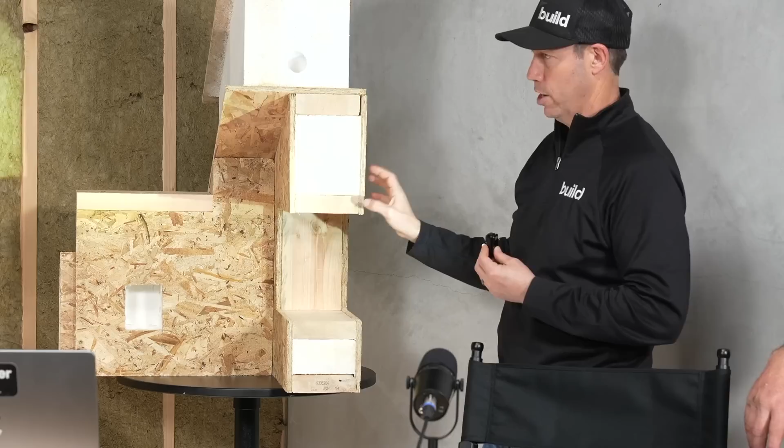We've got our normal wall panel, which this is a 6.5-inch wall panel, which is an R26. So what you're seeing here, I'm sorry to interrupt, this is the actual insulation. Correct. He's talking about oriented strand board on both sides, and we're going to talk about what kind of that is. That's a special type for you guys. And then you're also going to notice there is some framing embedded in these panels, but the panel itself might go a long, long ways between framing, correct?

Correct. Our normal framing factor will be 3 to 5% of a build in comparison to 25 to 35% of a build. That's amazing. So a lot more insulation, and that's the basis. We're using expanded polystyrene as our core, and whatever the thickness of that core, the stronger we get, the thicker we go with the panel. So it just depends. Our strength is awesome, and panels themselves, they're 2.5 times stronger than a conventional framed wall.

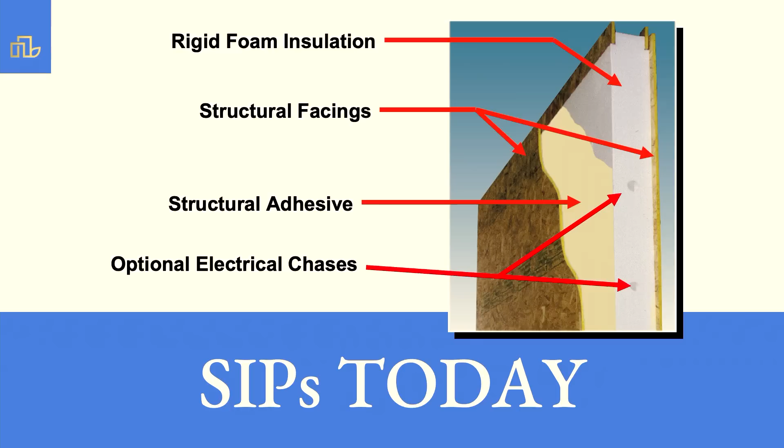Holy cow. So, building them in big pieces, which Extreme, we're really good at that. 8 by 24 jumbo panels, and the makeup of it is literally the glue, as you can see between here. Some panels they inject foam. This is not. This is a block of foam, and we have a glue line. So when we're making an 8 by 24 panel, we've actually got 14 pounds of glue holding that panel together. Holy cow. And it's done under pressure, and it's done under perfect conditions. Right. And it's really great.

And as you can see, we've got the electrical chases. You can see the holes in there. You can see holes here. We have outlet and switch chases in that panel. Shine my light into that one right here. So it's going to be a little hard to see, but see how my light is coming through here? This is an electrical chase that allows you to go up or down. And then not shown here in the panel, what I've seen on the job site is you guys are marking those chases, so you know exactly where they are.

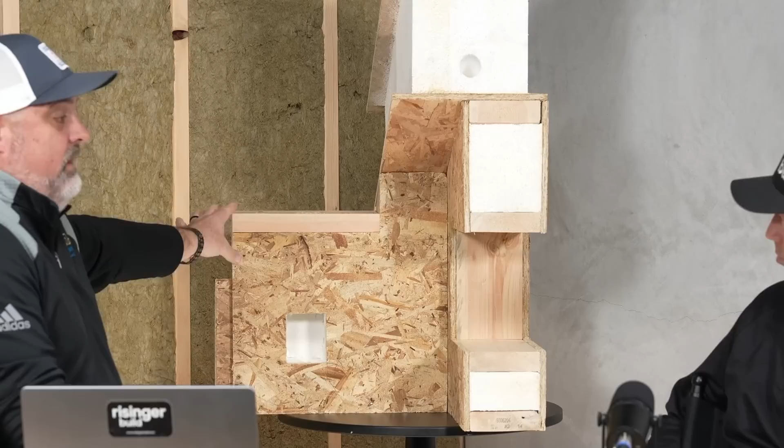That's cool. And like here, what we're showing you is a truss detail. So if we were to put a roof truss on there, you have a double top plate for that truss to sit on. But if we do a paneled roof, we are bevel cutting that panel at the pitch of the roof, so it's all continuous and it's seamless. Would you actually pull that panel off real quick? Sure. Since you dropped it in, I think it's kind of cool to show guys.

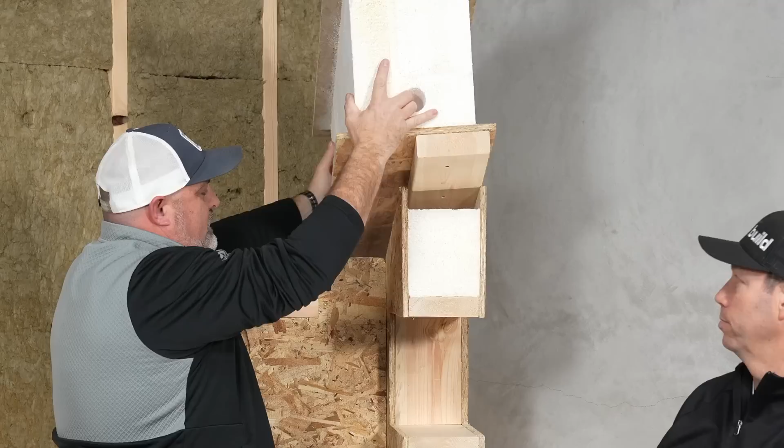So in other words, this is already attached, or we're attaching that in the field? This would be put in the wall first. We just simply did it for a demonstration purpose. So this is in the wall already. And then we have a long screw that comes through and attaches to this. Plus we're putting beads of sealant here to stop air migrating. And that is a giant piece of EPS.

What's the R value on that panel? This is an R, we call it a 49. That's what we're using in Minnesota all the time for the northern climates. But without having those members, our insulation value, because it's continuous everywhere, actually goes up. And the performance of the building is just greater because we don't have the thermal loss everywhere.

Yeah, if you look at this wall in my studio here, a lot of builders would call that an R19 wall if there's an R19 batt in there. But the fact that you can see all those studs, and this is a 20% framing factor, let's say, this is not an R19 wall. Right. Whereas when you guys have a panel, we have very long distances without studs and massive amounts of insulation, so you have a much higher overall effective R value, correct? We try to do the whole roof without lumber in it, if that's at all possible. Yep.

In that case, we try to put more structure under a roof than actually within the roof. Makes sense. So, SIPs have been around, Matt, a long time. We love this picture. We found this. We believe this was in Wisconsin, probably in the 1930s or 40s. They were cardboard cores with plywood skins, and that's really the stress skin panel. That's where it really evolved. It was in Wisconsin, UW Madison. Is that really right? That's where it was. That's pretty awesome.

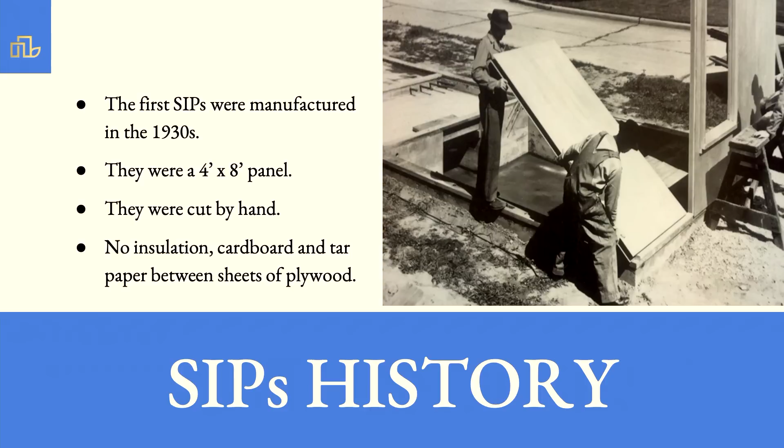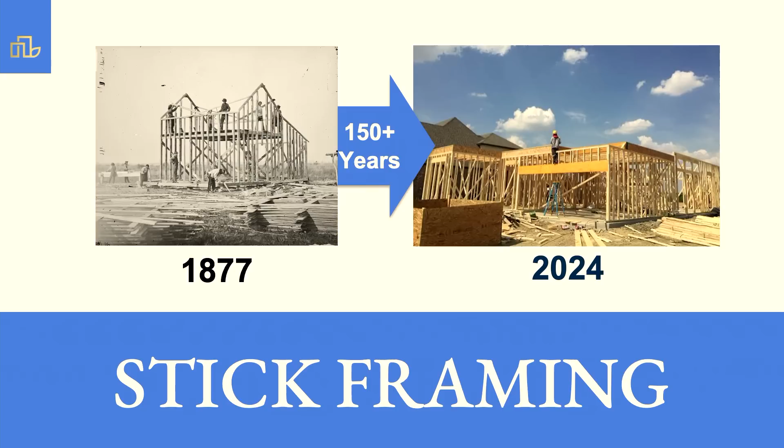So they were mainly 4x8 panels. They were all cut by hand, but the insulation wasn't back then. It wasn't Dow. It wasn't styrofoam. So it's great that we are 100 years old in terms of construction. That's pretty cool. I love this, this is a Sam Rashkin. From 1877 to 2024, we really haven't changed a whole lot, have we? It does bother me that our industry is very slow to change. Yeah, it's just one of those things.

It's a tough one. Why consider SIPs? You're going to hear some really good reasons today with Todd and Eric here. But the strength, it's huge. We can compare our 6-inch wall to a 2x10 strength-wise, and no one builds with 2x10s. It's really the most energy efficient building method out there. That's a system. And we are code compliant. We've got all of our code listings and everything that's needed for code.

Our walls are true and straight. And that's what builders are going to notice the first time they do a building: wow, this thing is super flat, it's square, it's true. The top of the wall is the same. It's awesome. That's awesome. When you're sheetrocking and trimming and all that is when you're really going to notice a big difference.

During construction, you don't need a lot of bracing. Yes, you need bracing, we can't tell you don't need it, but we've seen buildings go up without bracing, and they've gone through 90 mile an hour winds, and they're fine. Holy cow. It's crazy. The shear of these buildings is incredible. And because we're gluing it as we're putting it together, you're not just setting a panel and the fasteners are holding it. The SIP seal that we use is a structural adhesive, and it's amazing. That's not in our numbers or calculations, but it's an added benefit. It's air sealing, but it's also helping with our structure.

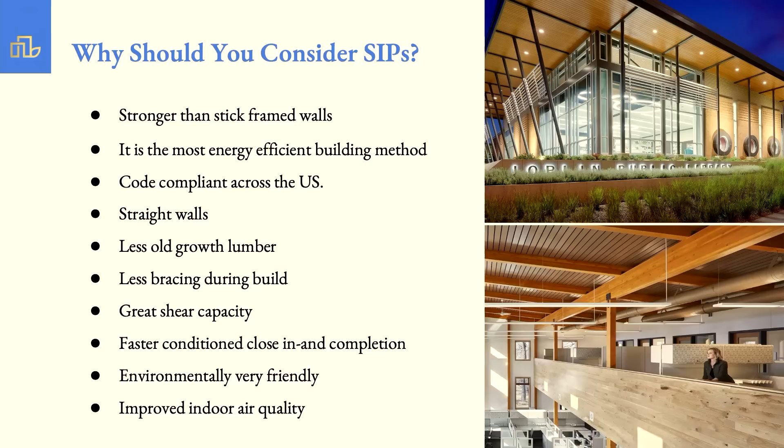Right. I love the term environmentally friendly here because everybody sees waste on a job site. With our system, guys, what do we have for waste on a job site? You're talking a garbage bag a day. That's about it. It's crazy. So we're not putting things in the landfill. It's amazing what this system can do. Every piece gets used. When the job's up, pieces are gone. It's really cool. That's awesome.

And indoor air quality. When we have a wall that isn't allowing things to flow through it, we are protecting our indoor air. It's a huge factor in today's world. It's a big deal. So always bring in fresh air. We're so tight, we need to do that. That's just a given. Let me pause you for one sec. Sure.

I think one of the things that's really hit me about Extreme Panel and your technology, SIPs in general but yours in specific, is that this is a really straightforward way to get a very well insulated, very airtight house. I've done a lot of stick builds. I've only done one SIPs house in my career. I've done an ICF house. This is a really built-in way to get high performance. If you stick to the plan, it's like a guaranteed result. Whereas with stick framing, you've seen my videos, there's a lot we need to do to get a very airtight building. It's built-in performance, which I really like.

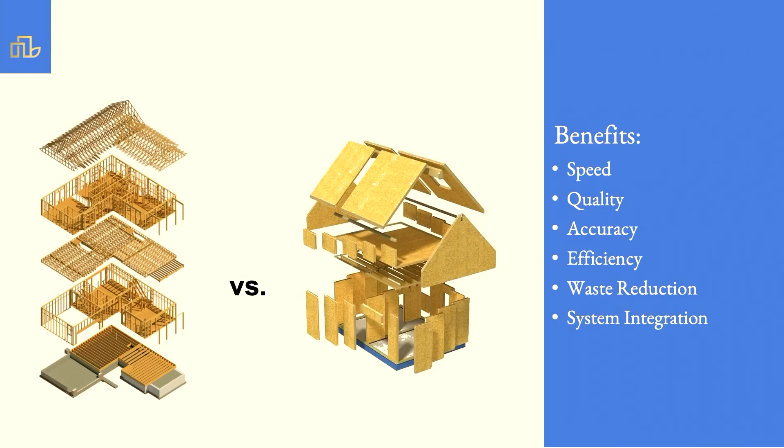The speed is huge. We have found in the jobs that we've been to in Alabama, literally having houses right next to each other, they are able to do 2 of our SIP homes in the time they can do 1 stick-framed house. It's pretty amazing. So with the same crew, the same weather, everything. So the time of construction is getting knocked way down, which is just phenomenal.

The panel company differences: Extreme Panel, I feel we're one of the top companies in the industry. We've been doing this for 33 years. There are companies out there that just do blank panels. You cut them on site, and that's out there. We used to send a lot of blank panels out. Now that's like 1% of our business, if that. There are projects where you could just have panels come pre-cut, and you could supply all the miscellaneous material.

But our normal package is what we call a ready to assemble, where everything is pre-made. All the headers are actually pre-made, pre-cut. They're insulated. The king and cripple studs are pre-made and labeled, and if that header is number 11, you've got 2 pieces labeled number 11 that are supporting it. And that is what Extreme has really become really good at.

Yeah, that's huge. We just got word from a customer this week that they used our package for the first time instead of other companies, and they were really happy with the package, how full it was. Everything's trimmed. It's a different package than what's normally out there. That's awesome. And we try to be all inclusive where every piece is coming. And I think that's a theme you're going to see us talking about a lot, and I suspect that both Todd and Eric are going to mention too how Extreme Panel is a different company than a lot of manufacturers out there. Yes, right.

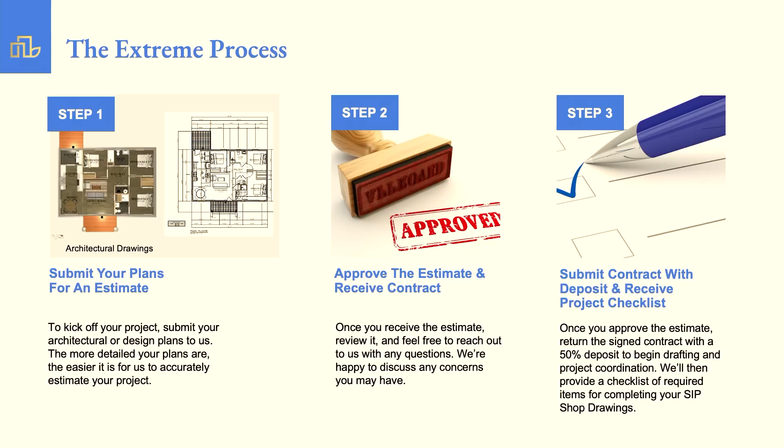Yeah. The Extreme process. We really like having this laid out for our customers so they know what's happening. And what Extreme is really trying to do is help builders with their issues on site, what makes their projects not go well. And I just heard from a builder that we're hopefully doing our first project with here soon. And he just said, it seems like all these companies just want to sell their material and walk away, and I have to deal with the problems. And he's like, I really want service. And I said, we are that company. We can give you that service.

We have a whole group of project coordinators, a whole group of drafters. Our team is really doing a good job at getting the details and putting it all together. Our sales staff, I'm so proud of my guys. They're just amazing. And our process is very well laid out. It's basically 9 steps. We go through everything in detail, a full set of shop drawings that you're going to get, no matter if your project's an ADU, a garage, a huge shop, or a mansion. We go through the same process for every single job.

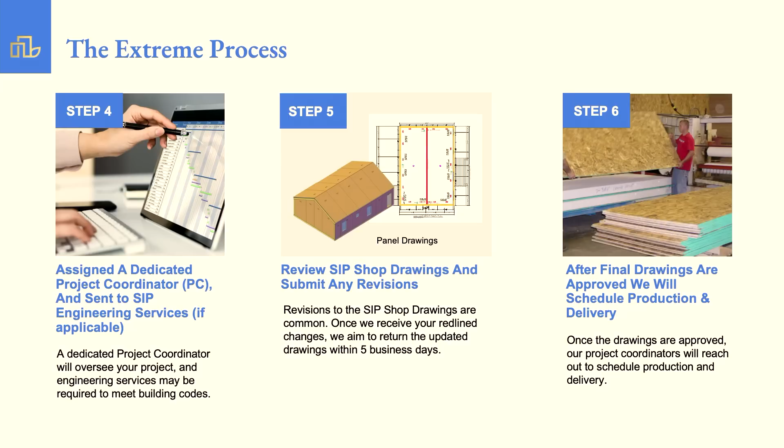That's awesome. We're asking the same questions if it's a dog house or if it's a 10,000 square foot house. So everything gets the same treatment. And it's really quite amazing. And it just takes care of everything on paper before the issues arise. So our coordinators are asking all the right questions because we want it right the first time. So they do a really good job, and I'm very happy with our process. And you can review this on our website. It's all on there, and it makes it simple for you, the customer.

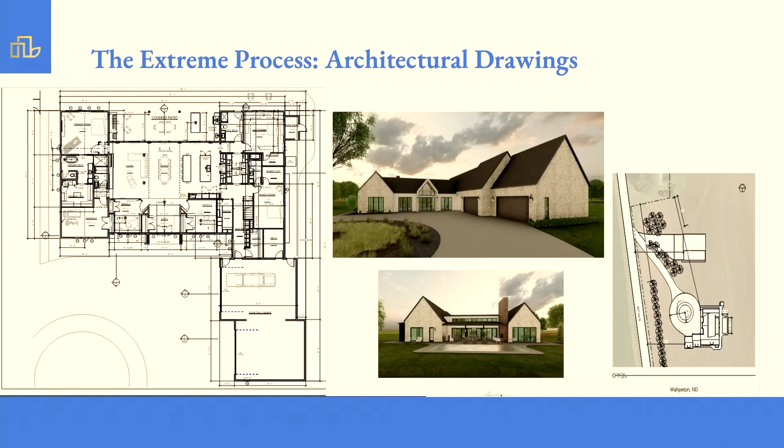And I mean, we're seeing drawings, the basic drawings. We just saw one out in your office, Matt. We see the higher end home as kind of our basis. That's our niche market.

But we see napkins. We literally see it. We see people that want a 30 by 40 garage or a 50 by 80. I mean, we see it all the time. That's awesome. And we can help guide people through the whole system. And you guys have an engineer that you can get for your designs, right? So you don't have to have an engineered set of plans ahead of time.

And typically what's happening is somebody's bringing us a set of plans, but we need to go through and kind of value design. What works with our panels? Maybe a certain roof system isn't going to be what they're going to want to work on. So we can just do walls, or we can just do a roof. We can do certain parts of projects. But it literally depends on what the job is. And we'll go through every plan up front and try to figure out, what do we want to do? How do we want to do it?

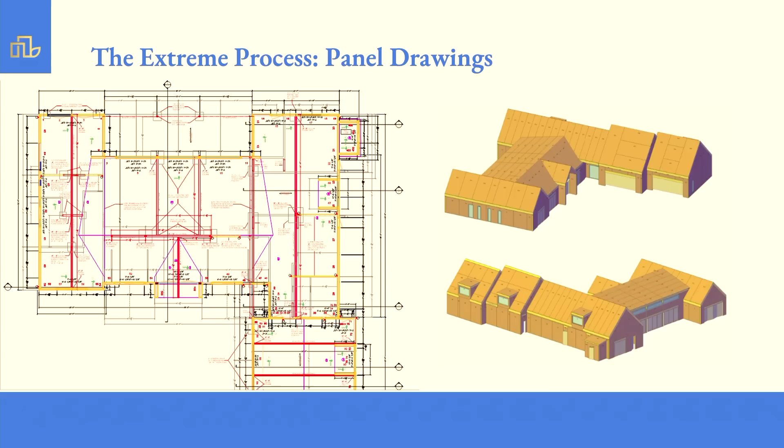And right here we're showing that job, the actual panel drawings of that project. You get a 3D view of those drawings, and depending on the job, this job probably had 15 or 20 pages of drawings, all just panel layout structural drawings. That's great. So it is really good. It's very advanced, and every detail is there. A lot of it's for the manufacturing, but it also helps out the builders. So all those little details that go into it really make a big difference.

So our panels, the main basis of Extreme is an 8x24 jumbo panel. Let me pause you for a second there. Meaning, when we see 4x8 sheets of OSB on the job site, that's not what these are being built from. They're getting a direct shipment from the manufacturer of 8 foot wide by 24 foot long in one sheet, as if it was one jolly green giant sheet of plywood, right? This is a massive sheet. It's a massive sheet. And we actually get them larger than that 8x24, because when we press it together, we can press that together in 4.5 minutes, which is wonderful, with one guy running a computer.

Wow. That's pretty wild. It's an amazing machine, and we want you to come and see it. I would like to see that. That would be cool.

And it's Terry Deacon, our founder of Extreme. It was in his head for years. He couldn't wait to get this thing made. And it's literally been the best machine because it's one person making 192 square feet in 4.5 minutes. Oh my gosh. That's really cool. And that 8x24 panel, we will cut it. It'll get cut perfectly according to the panel drawings.

And then they're sent out with zinc borate treated skins. So at Extreme, we don't give people options of the board. That's the only option we have. So your OSB is already zinc borate treated? It has zinc borate. We call it Structure Shield. You can't buy that off the shelf. No, you can't buy it off the shelf. And that allows us to really sell panels all over the U.S. because it's termite and bug resistant.

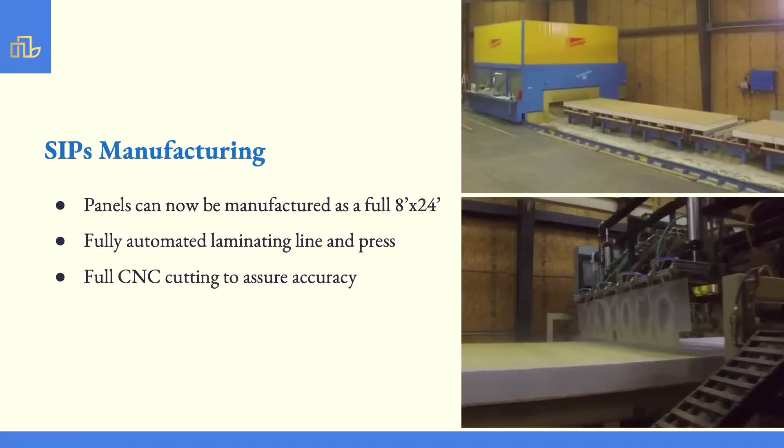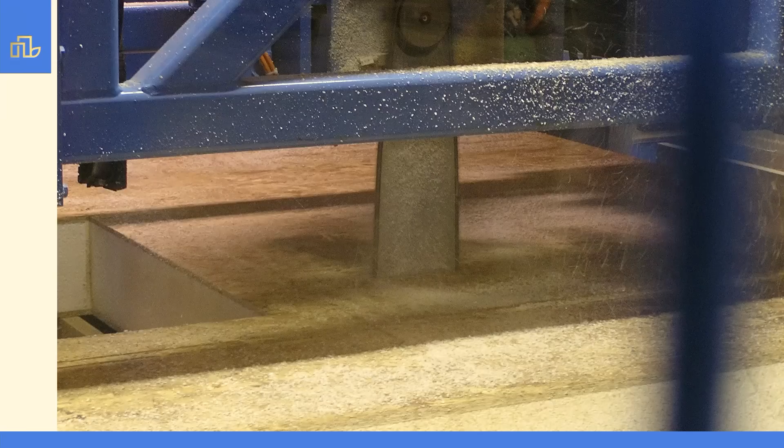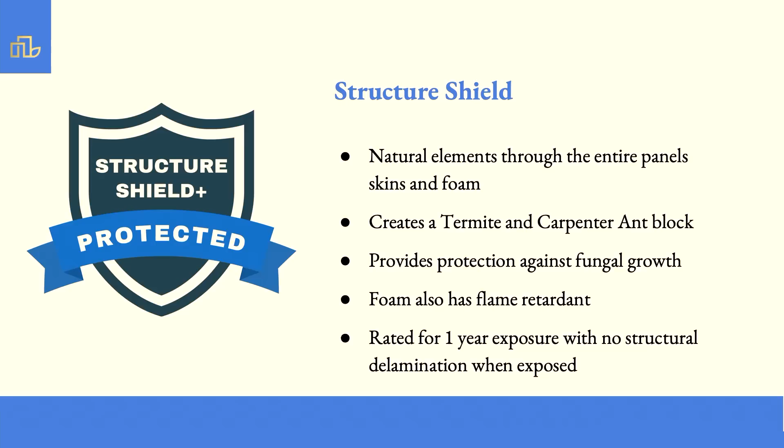So here it shows our CNC machine. Within that machine, we have a 38-inch skill saw right there that can rotate on a 5-axis pivot head, a chainsaw that can plunge cut and do bevels, and a router that's making a picket fence there. It's actually for an animation that we did. This is talking about the Structure Shield, the OSB. It's those natural elements in the board that take care of the termites, and the zinc is a preservative. So it's really good stuff.

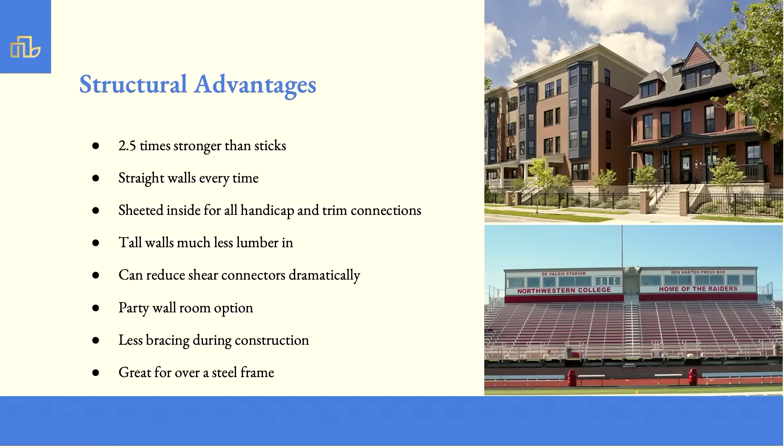The structural advantages of our panels: it's literally 2.5 times stronger. The walls are straight every time, like I said before. Tall walls are really cool to build with panels, right? And pretty straightforward too, right? Because they're pretty straightforward, and it just leads into more of those big buildings.

A lot of people, we do huge structures a lot. I bet. 50 by 80, 80 by 120. It just depends on what the need is, and we can make them very, very effective. That's cool. And people will ask about a 50 by, say, just a pole shed.

Well, our buildings can be put up in a day or two, and literally then you could put regular trusses on it, but have an insulated wall that's 16, 20 feet tall, and ready to go. And literally we're 8 foot by 16 or 20 foot. Those pieces, you got 25 pieces to a building. It's awesome. It's insane, and they go up really, really fast. I bet. That's awesome.

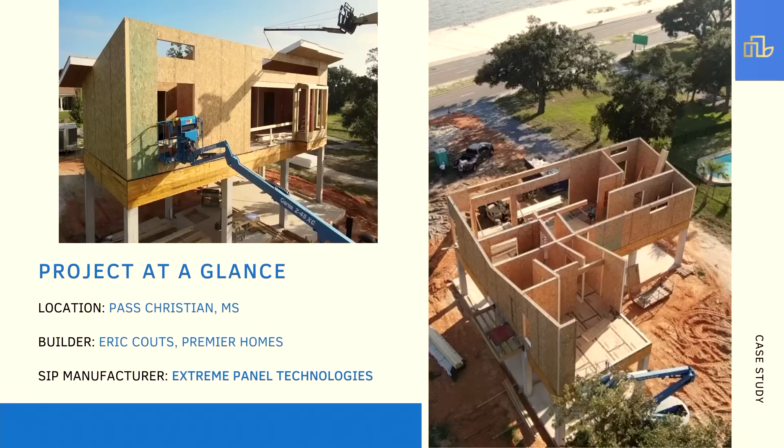All different types of buildings, from commercial, multifamily, our niche, the custom residential, and boy, we've done some amazing projects in the last 33 years. It's been a lot of fun to do. Here's a project that Eric personally did. I gave Eric a call and said, Eric, we have a job in Pass Christian, Mississippi, and Eric's from Maryville, Missouri. So he brought his crew down there, and you were down there for how long, Eric?

6 days. 6 days. Keep in mind, this building is 14 feet off the ground, so everything was pretty elevated. Yeah, pretty high. You didn't use an 8-foot ladder for anything on that job. Yeah. Not. But this has been really a fun project. We'll meet him tomorrow. We'll be doing a video there tomorrow.

Talk to us real quick about hurricane resistance, and actually a question, by the way. Good job on the questions, y'all. We're getting question after question. A lot of people want to ask us some stuff. Good. I'm going to throw these two in there while we're thinking about this. Talk to us about hurricane resistance and maybe even fire resistance.

So, the biggest thing with our panels, you can see in this slide right here, we actually did 80% of the interior walls. Well, the homeowner wanted that, and we're like, we can do that, but it actually helped us in shear, because panels are so good at shear. And what I mean by that is just the lateral load, the winds, and the racking of the building. Because we're 2 sheets of sheathing and foam, the whole panel's in essence a shear wall. Right. So it really helps.

And then here in this job, we have hold downs. We have plenty of hardware in this thing. The panel screws that were put in that particular job, because we're designing for hurricane force winds, we had 5 inches on center in some spots, all the way around the perimeter of that roof. And then a double top plate at the top of the wall, just to give more beef to go into.

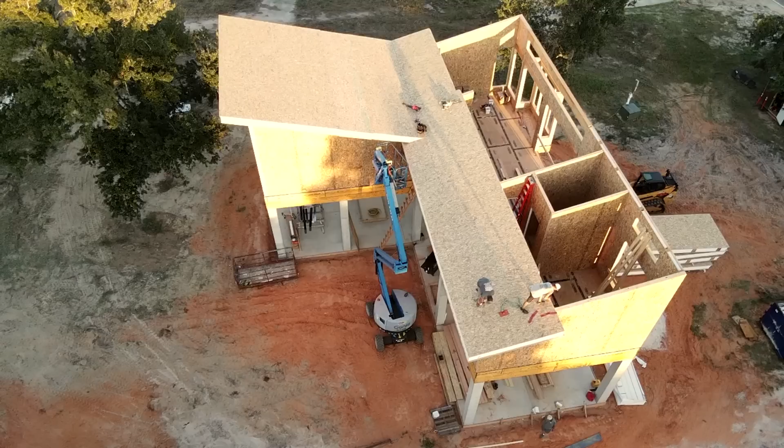Yeah, I love this picture that we're looking at right now because you're seeing the full panel overhang. People would say, well, I don't need that insulated, but it's adding the structure. It's sitting out there. It's simple. The time frame of putting it up is super fast. And you're not having to frame an overhang onto it, which can be done too. I love the look of that. And Eric had his drone there while we were shooting this, so it was really fantastic.

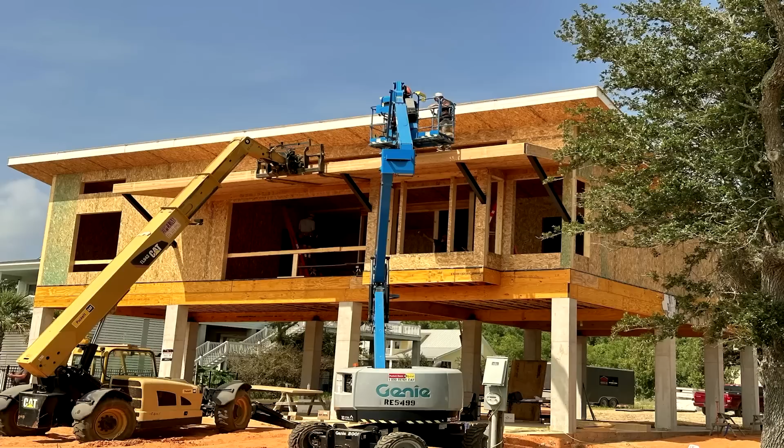Is that the Mississippi House? This is still the Mississippi House, and then he actually put this whole porch together, which was what, 32 feet long? It was over 30 feet, and we set it all in one piece. I think it was 10 or 11 feet out. Holy cow. It covered the whole deck that they were going to put underneath it, and we put all that together on the ground and picked it up in one piece and slid it into the house. That's fabulous. Super fast. Really cool.

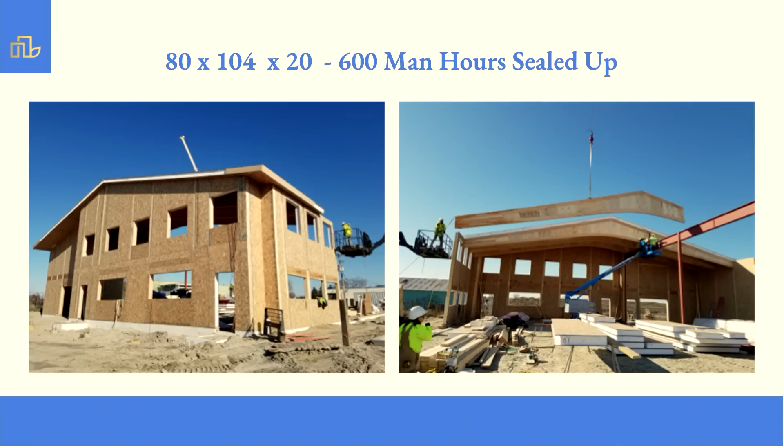And what's the span on that building now? That one I don't remember, but I want to say it was big, like 80-some feet wide, which is why, since Starwood only makes up to a 72-foot wide, we ended up splitting it, because they were wider than the 72. That's cool. It is cool.

We're so excited from an Extreme standpoint to have the group of guys that have always been our core of dealers, and Eric and Todd are part of that. And we actually just lost two of our dealers that we've had for a long, long time this last year. And they're so important. One actually wrote a book on structural insulated panels, and he was a customer of ours for 20-some years. Wow. So there's a huge history with what we have going on here, and we're all about continuing that and growing the Extreme dealer network. Love it.

With that being said, let's jump over to you, Todd. You gave us a little PowerPoint. Eric. I just called you Todd. I'm sorry. Sorry, Eric. I got my notes mixed up on you two, and for some reason I keep calling you the wrong name.

All right, so Eric, give us the history of Premier Homes, and ideally we're hoping to find out when did you find out about SIPs in general, Extreme Panel specifically, and what's been the benefit for you of partnering with these guys? But just full disclosure here, he doesn't get paid by Extreme Panel. He's getting paid by his customers, by people that he's maybe assembling SIP panels for. So he may have an Extreme Panel logo on, but he's not an employee like Perry is.

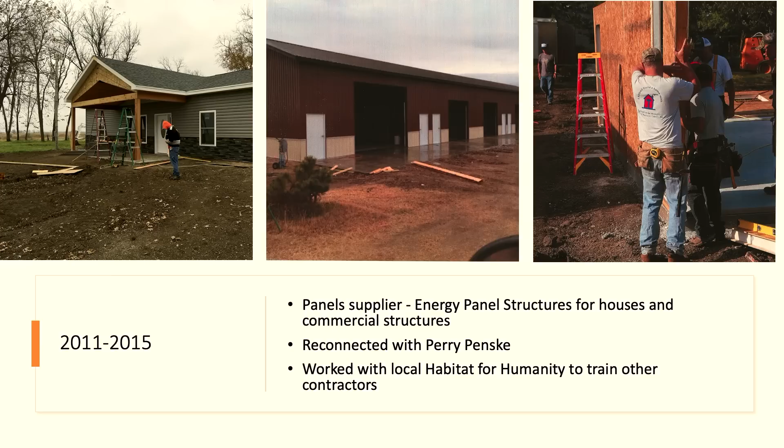I did those spec houses for myself, did some garages for some people, did whatever, and when I came on board with Extreme, that changed because they had me step outside of my comfort zone a little bit. And probably the biggest house that we did at the time was around 2019. We did a big house in Weston, Missouri, and it was a 10,000 square foot home.

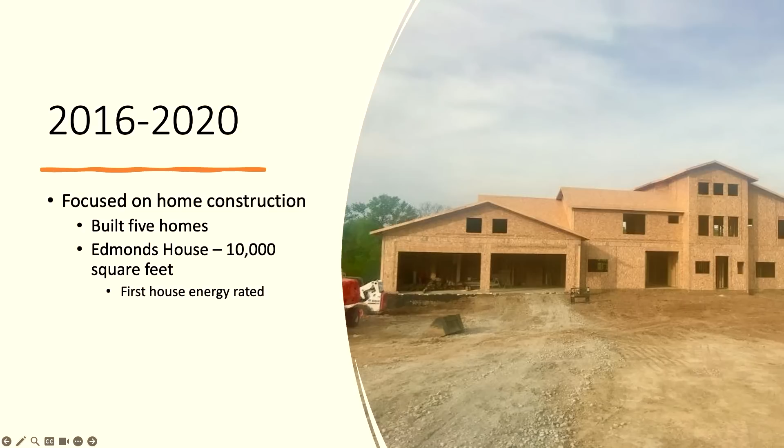And the homeowners actually met the Extreme people at the home show in Minneapolis. And they're talking to him, and they're like, well, we have a builder down there, maybe we can get him to do it. And it happened to be the people that they were talking to was a guy that I was in Boy Scouts with. So I stepped out of my box and said, well, yeah, we'll do it. And they kept saying, yeah, you're going to do roof panels, you're going to do everything. And we did foundation panels, roof panels. I mean, we went in with both feet.

And the biggest thing I remember is I kept trying to figure out this roof, and they kept saying, well, you just have to start in the right spot. I asked several times, where's that spot? Well, they brought on another guy like myself who had done roof panels to help me. And I think that's kind of why we're here today, it's a family thing that we all help one another. Todd and I compete, but yet we don't compete. We help one another. We all talk to one another regularly, and without that extra push to get outside of our comfort zone, because I think change is hard in this industry.

For sure. There's a lot of, I've never seen it before, so I'm not going to do it. And I think had I not had it introduced to me when I first started doing spec houses to say, well, I'd try one, because at that time I was like, well, the worst I can do is say I won't do another one. Yeah. I haven't looked back. I mean, we've actually stick framed one house since we started in 2005. And that was because the homeowner wanted to do panels, his electrician convinced him otherwise. That window was open and I didn't have anything else scheduled, so we did it.

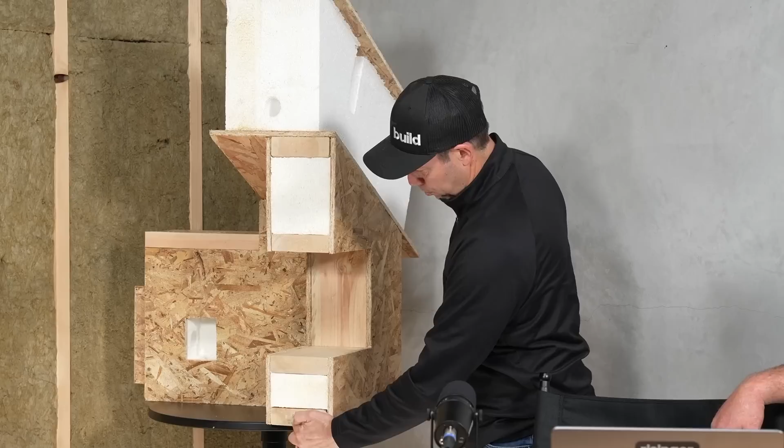Let me explain that from my perspective after getting to know these guys for a while, having done a SIPS house. First off, when we put this bottom plate down, let's pretend like this is a tall panel. The bottom plate is set on the foundation, treated just like any normal bottom plate where you're going to have some sill seal underneath. So I would do the Steve Baczek detail where you put a bead of, let's say, Sashco, Lexel, or acoustic sealant, put your sill sealer down, put another bead on top, and then bolt down your bottom plate.

Someone asked about bolting them down. So this is pressure treated 2x6, let's say, because this is essentially a 2x6 wall. That's bolted down. And then this panel, if you can picture this 2x6 not being here, this panel just flops down on top of that 2x6. And then we're going to screw in on the sides here. Before we flop it down, though, we're going to put a bead of SIPS sealant.

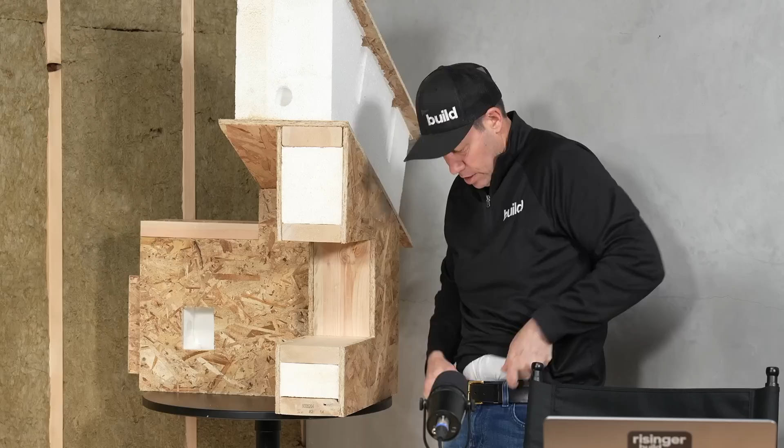Am I saying the right name? SIPS seal. It's basically like a super caulking. Think of like the difference between a fluid applied and like big stretch, right? A relatively viscous that they're putting a full bead on both sides of this, dropping the panel onto. It's providing that belt, and we're gonna put suspenders on the building, right? We really like that. So then once this panel is set, when the roof goes on, there's another bead of SIP seal on there. If 2 panels come in, there's SIP seal on there.

It is a little dependent on Todd and Eric and their crews doing a good job during construction. But if they do a good job and he brings that blower door out, forget the house wrap, forget the zip. You should be able to blower door test this once I put my windows in and just have bare OSB. Let's say it's a dry week, you have no issues of putting anything on. You don't need anything on the outside for air tightness. The SIPS panel and the way it's built and the way it's installed is airtight to begin with. Did I say anything that's an outright lie? Nope. So far you're perfect.

Tracking with me. So the reason why, well, there's multiple reasons. They don't use Huber Zip System because for one, Huber won't sell them 8-foot by 24-foot panels, right? Because that's where their system is really awesome, is that they've got these giant sheets of OSB. I can fly in this huge panel, and they've got these huge sheets of OSB that are structurally sound. So Huber Zip, not an option.

However, most of the jobs, frankly, just have standard white house wrap out there. I don't say their name because they're not a Build Show sponsor. There's a bigger story there, but staple it on, and all we're using is a good raincoat. That's all we care about is the raincoat. That house wrap, whatever brand or type, stapled on, it's really just a raincoat on the outside of the building to keep this dry. Now, we still want to use our best practices. I would still like to see a rain screen. I'd still like to see an air gap. All that stuff is still in play, but we don't necessarily need that for air tightness.